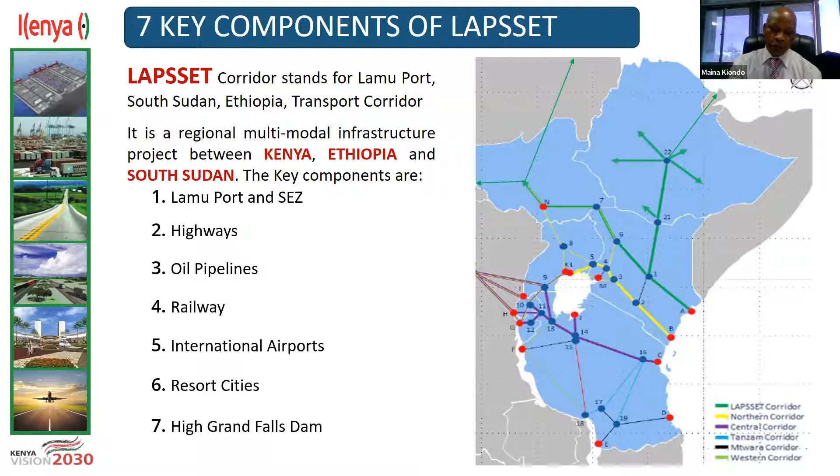LAPSSET stands for Lamu Port, South Sudan, Ethiopia Transport Corridor, with a number of components: the Lamu Port and Special Economic Zone, highways, oil pipelines, railway, international airports, and 3 resort cities. We also have a proposed dam, mainly to supply water to the main port.

The LAPSSET project is the biggest project in our country's Vision 2030, which is the planning blueprint we are using. It has also been admitted in the African Union as a Presidential Infrastructure Champion Initiative, where our president is the champion, and it has been recognized as a PIDA priority project.

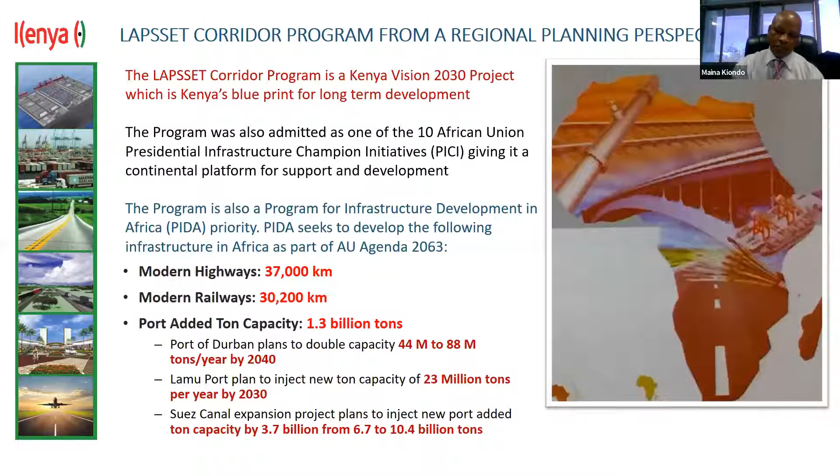In the PIDA project, they intend to do modern highways, 37,000 kilometers, and modern railways, all for connectivity. There is also the issue of adding port capacity, and our project happens to be within these projects.

The LAPSSET Corridor project is intended to have the Lamu Port connect all the way to Isiolo. From there, we can branch to Ethiopia, which can join to Eritrea and Djibouti, or take the other route to Juba, which can connect us to Bangui and Douala. That is the corridor we are talking about.

So the corridor is from Lamu to Ethiopia, and also from Lamu to Juba for the time being.

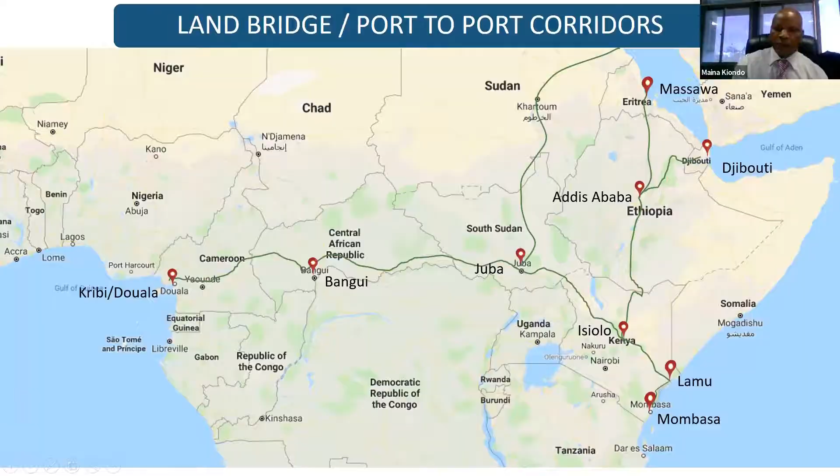The second and third berths were supposed to be completed by 2021. We are still within the timelines, as we speak they are at almost 86% complete.

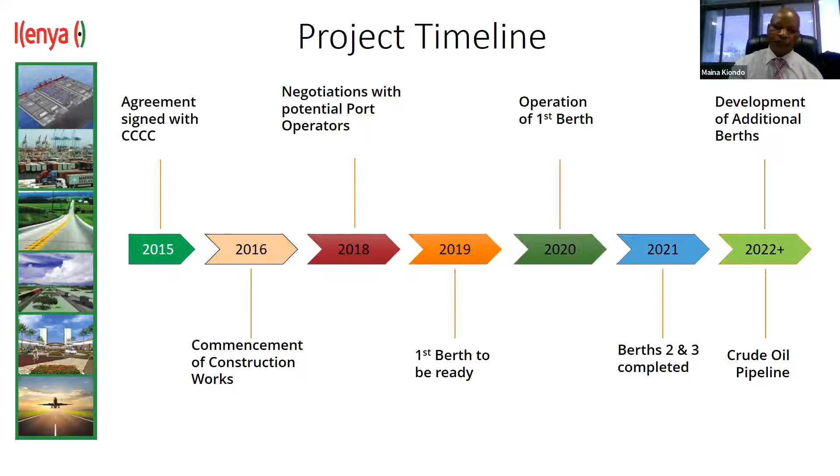Now looking at the opportunities we have in this project as far as public-private partnership is concerned, we have 3: the Lamu Port Agri-Bulk Terminal, the Lamu Port Liquid Bulk Terminal, and the Special Economic Zone.

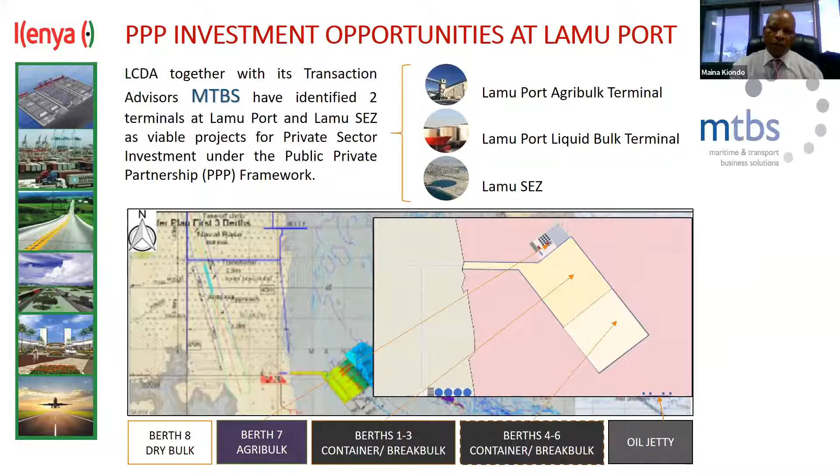The intention would be to do the first 3 berths through the assistance of our government, and then the next 20 berths or so should be done through public-private partnership. That's a version of what we are thinking for the agri-bulk terminal.

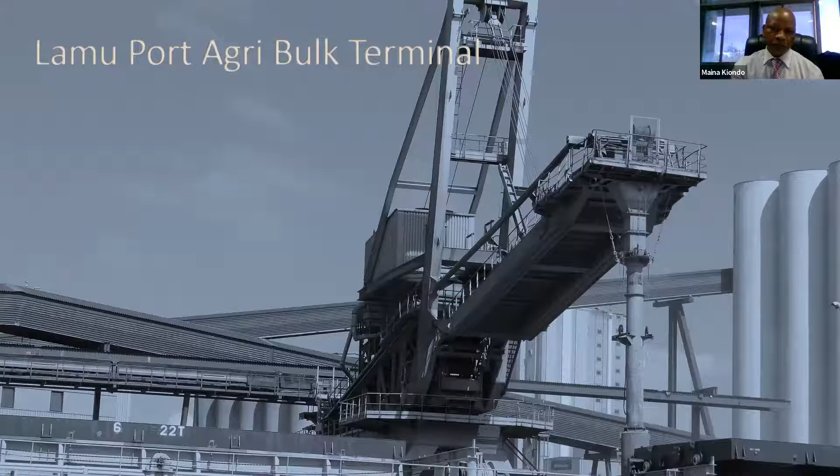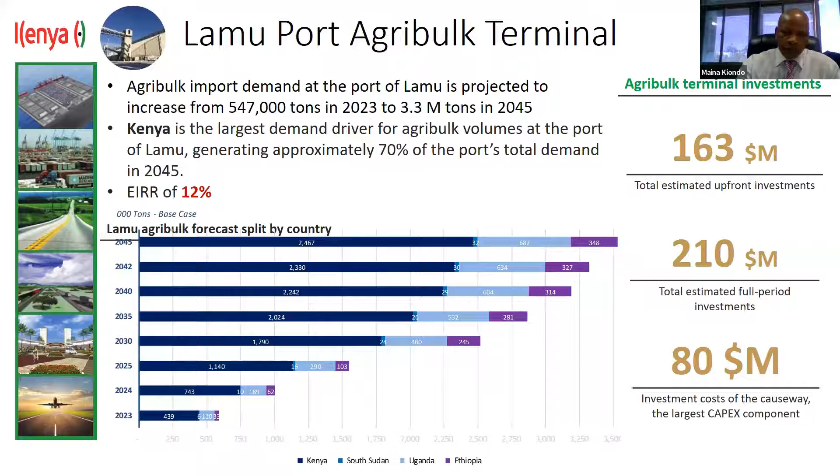The components of the agri-bulk terminal include the quay wall, the area for temporary storage, a dedicated conveyor belt for the terminal, truck loading stations, and parking facilities.

Looking at the areas, there is the terminal area of about 10.8 hectares, the quay wall of 240 meters, and we intend to do 16 silos.

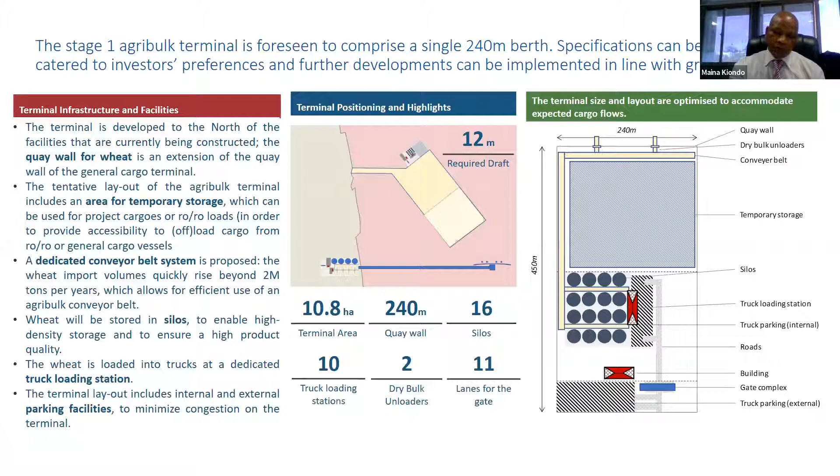Looking at the resource requirement, there is the infrastructure, which takes about 127 million USD. The superstructures take about $44 million. Then there is equipment and IT, taking about $40 million. The initial estimated upfront investment is about $163 million, and the estimated cost of operation is about $47 million.

If you were to phase out the project, we'd only have 2 phases, with the initial phase taking the $163 million, and the rest going to the second phase.

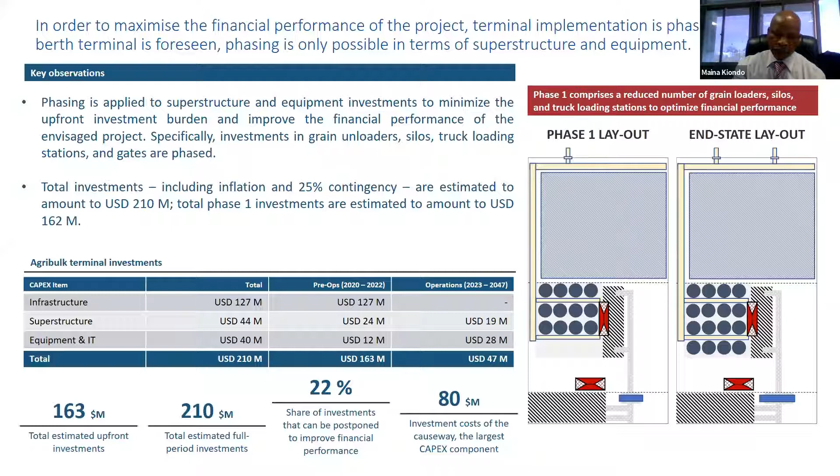Then we go to the liquid bulk terminal, which is meant for both refined and crude oil. The idea is to get crude oil from the Lokichar Basin down to Lamu Port, where it is refined, and then we have a refined oil pipeline taking the refined oil back to Juba and to Addis Ababa, Ethiopia.

This is because we anticipate those reserves, which translate to 60,000 barrels to 100,000 barrels when you consider the low and high of the same.

We are also anticipating that the demand for refined oil product imports and crude oil exports in Kenya is expected to increase from 6.8 million tons in 2020 to 19.3 million tons in 2045.

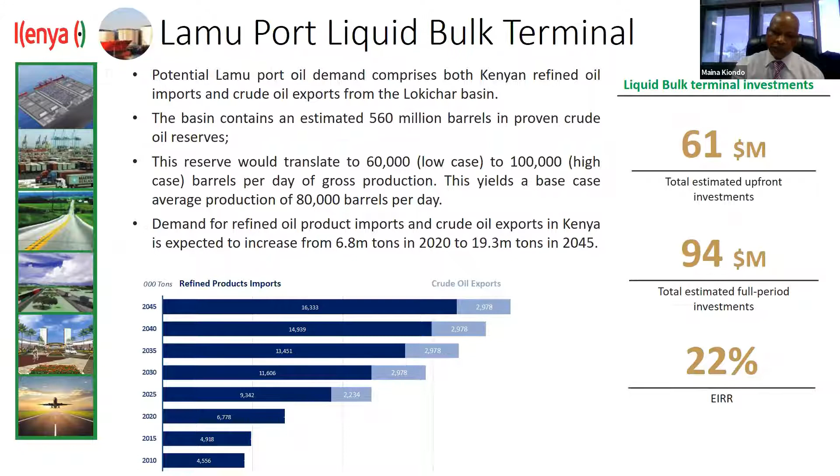The structures to be done would have large tanks and small tanks, 4 large tanks and 8 small tanks. We are also giving the occupancy rate with the first berth. Here you have the design of the tanks, the pipelines, and the oil tanks.

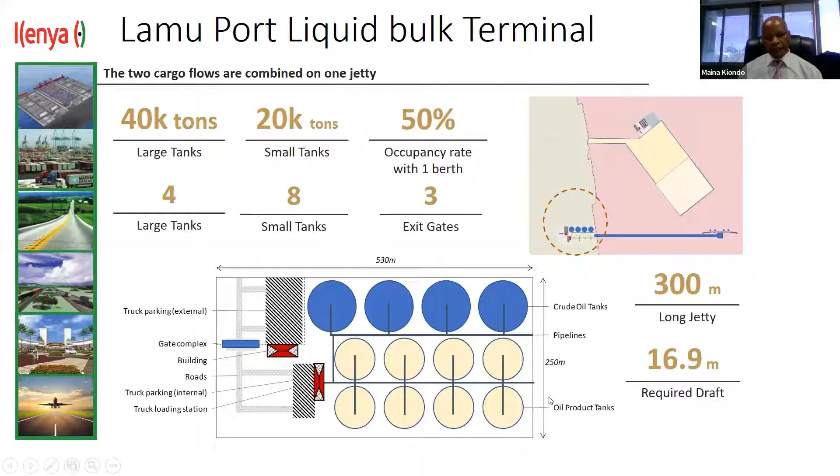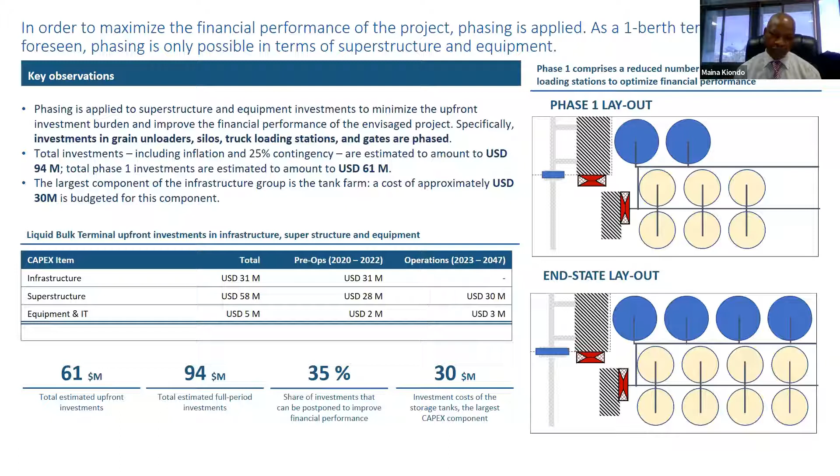The third opportunity is the special economic zone, Lamu Special Economic Zone. The objectives are quite a number: to diversify production of goods and services for domestic and export markets, attract both local and foreign investments, promote value addition, promote local entrepreneurship through small and medium enterprises, enhance technology development and innovation, and promote rural and regional industrialization by exploiting comparative advantage of local resources.

The authority has made the following strides in realizing the Lamu Special Economic Zone. We already have a master plan for the zone, and an integrated transport infrastructure master plan. Currently we are in the process of designating Lamu as a special economic zone, which is ongoing.

So when it comes to resources required, or before we go to that, let's look at how we are seeing it. The Lamu Special Economic Zone saves tenants time and cost and creates connectivity, leading to market access for participating industries. There are the nautical characteristics: the Lamu port design includes berths capable of handling bulk carriers, container ships, and general cargo ships of various classes.

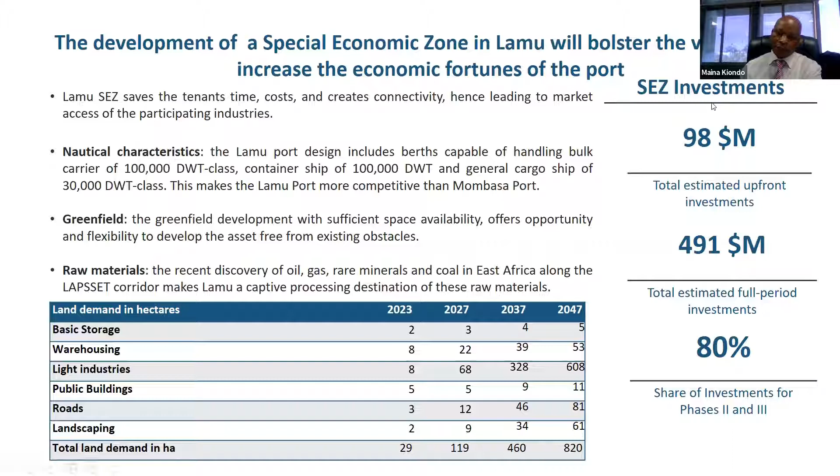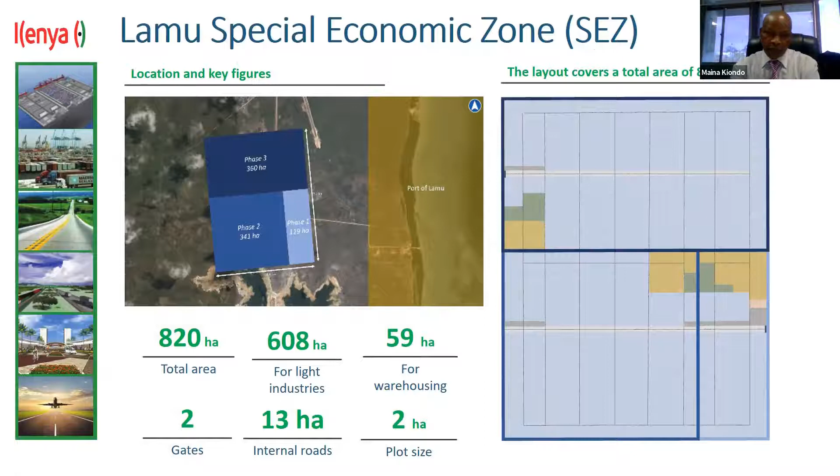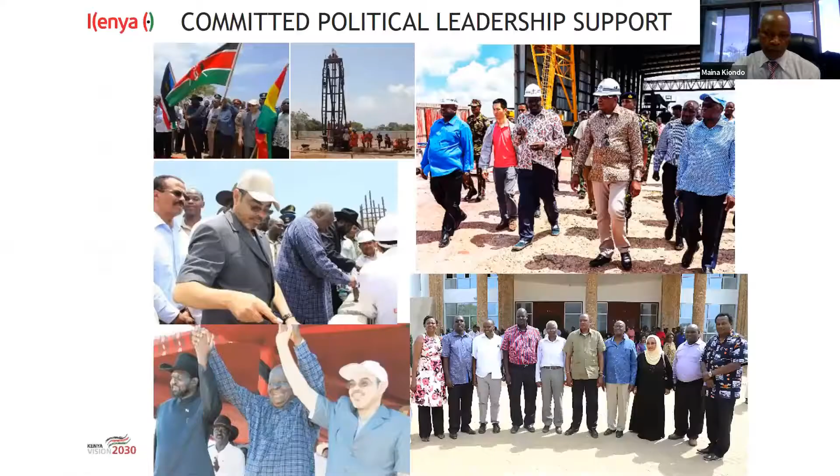What follows is just a pictorial of Lamu Port. I'll try to go very fast. This was during the time of commissioning, where you have our head of state and the former DG in the front line, and other leaders in the country.

This is the contractors' camp, where they used to manufacture the pipes which were meant to hold the ground where we reclaimed our port, because part of our port, for us to build it, we had to reclaim the sea for that port to be.

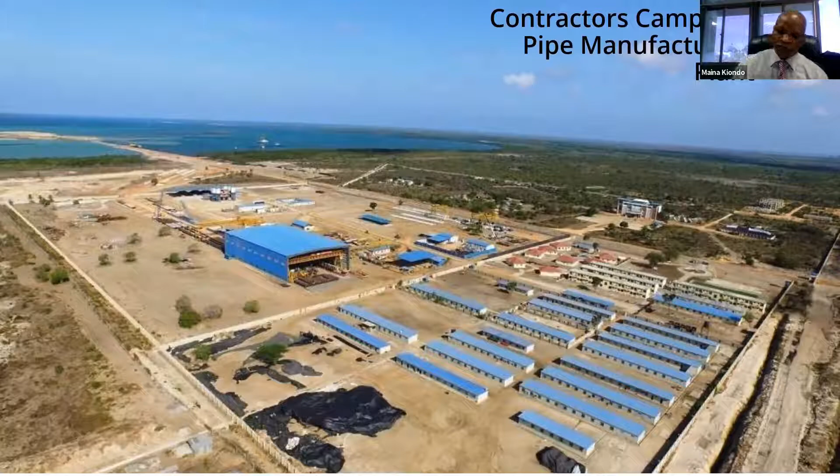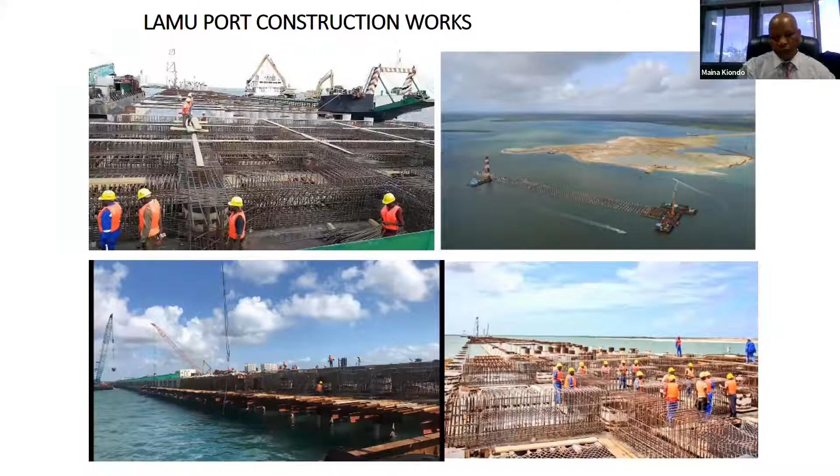This is part of the construction which was being done. Again, part of the construction in phases. We had to use this dredger to get material to fill in the sea part which we were reclaiming.

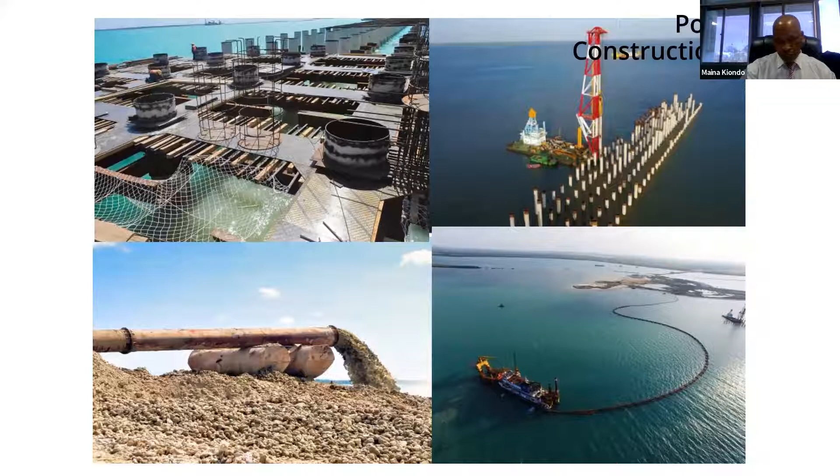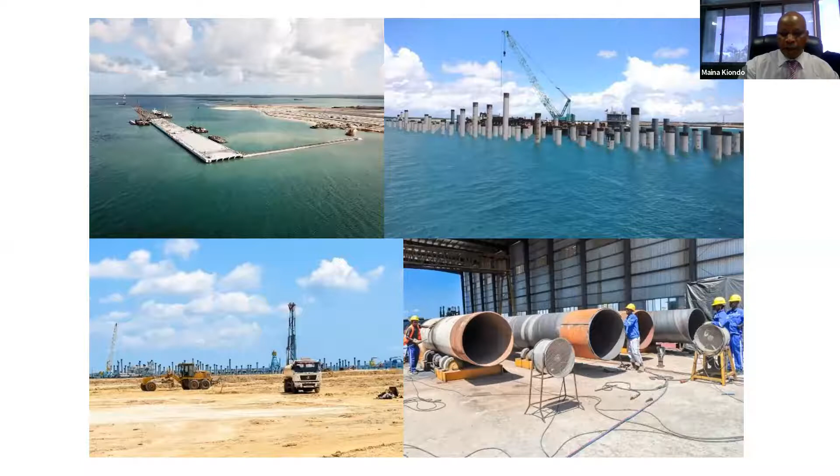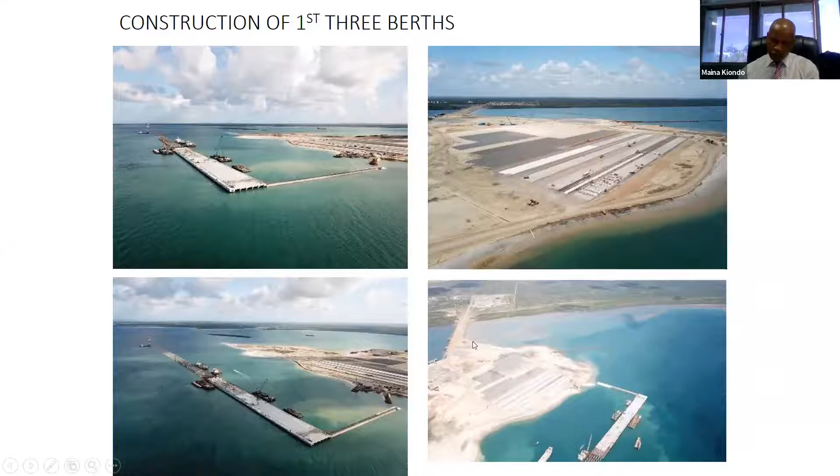This is part of the port. These are the three berths which are in construction. This was the road which was to join the port with the dry land, and it will be clear as we continue. Actually it's clearer here - you can see the already reclaimed part and the berths, and the road which is joining the port to the dry land.